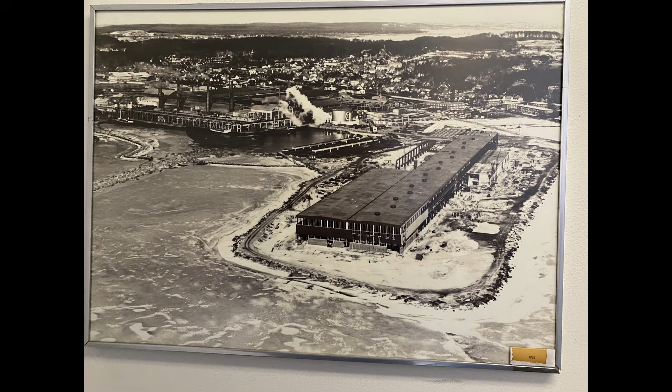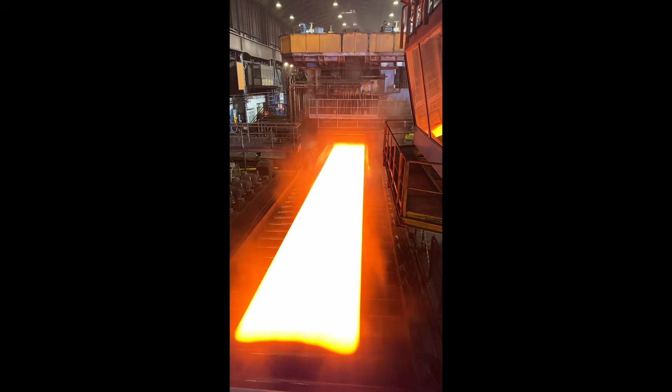In 1999, I started as a freshman at Dansteel, and now, 20 years later, I'm coming back to visit my successors. A lot is still as I remember it, but there have also been a lot of changes. In this podcast episode, we will take a deep dive into the production of very thick plates, together with my new friend Eugene. Hi, Eugene.

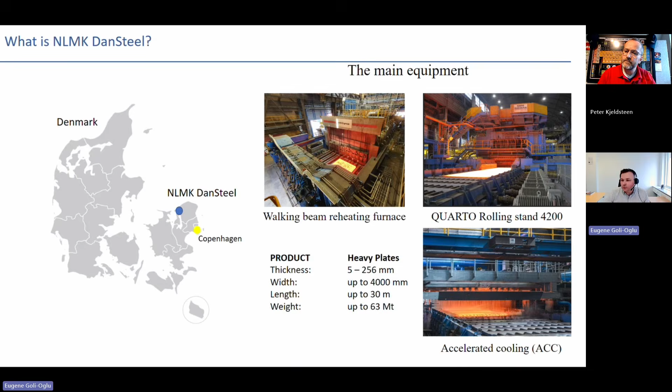Dansteel. Quite big. And steel heavy plates are used in several different industries. In main markets, we have, first of all, wind, both onshore and offshore. We have shipbuilding, boilers and pressure vessels, and bridge building. There are also other industries which require steel heavy plates, but they are normally slightly smaller. In the end, we have around 8 niches, I would say.

Because when you are passing a wind mill, either onshore or, for example, if you are traveling by ferry to Germany, you could see the Kriegers Flak offshore field, and the tower, the foundation and transition piece will be produced from steel heavy plate. The same as a tower when you are passing a normal highway; it will also be produced from steel heavy plate.

Bridges, it's a little bit more options. You could make it from concrete, but a lot of bridges are made from steel, and in this case, heavy plates are used quite often. For now, our maximum thickness, which we delivered to a Belgian bridge builder in 2025, was 147 millimeters in TM plus ACC, which is the most advanced technology. And we're also delivering thicker plates for basements, for complicated connections of the bridges, etc.

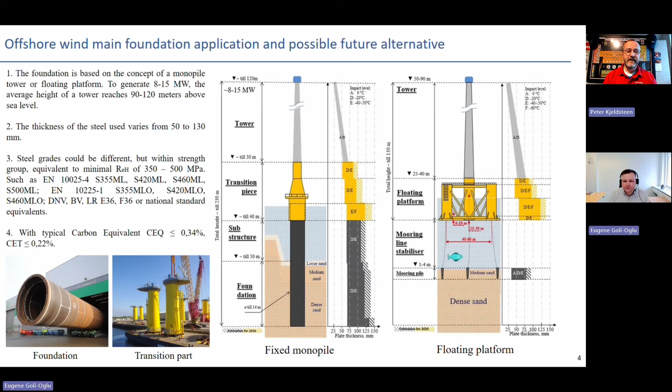Let's jump to the next. Next segment, what I think will be interesting for this podcast is the use of heavy plates for pressure vessels. And the interesting part with pressure vessels is that if you compare a pressure vessel with a tower, it will be very different. A tower, in our eyes, is more or less a standard structure. Of course, there is a lot of variability in thickness, but in the end, it's one type. But there are several types of pressure vessels depending on the final use and what they will carry inside.

Right now, we see good movement in CO2 storage tanks, for example, because the European Union is trying to be CO2 neutral and have zero emissions in the end. It's a combination of discussion, but also something already being done, and some projects are already implemented, and Dansteel is participating in these projects.

As soon as this is a new direction for pressure vessels, it is possible to use different concepts of steel heavy plates for pressure vessels depending on design, and in this case, the fabricator will choose what they would like to do, because we see now the trend that for those kinds of pressure vessels for CO2, the customer fabricator prefers to make them like storage tanks, and here is one example which was produced from Dansteel plates.

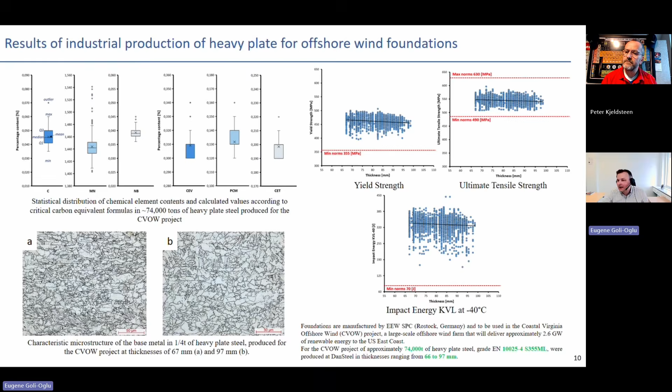And is there anisotropy in thick plates, or is that only seen in thin plates that are cold rolled? Yes, there is also anisotropy of properties, and the thicker the plates, the more complicated it is to make deformation, because the peak of deformation will be at 1/8 of plate thickness, and then it will be lower and lower. And then you have to combine both technology and chemical composition, aiming to achieve as good uniformity of the microstructure as possible, which depends on thickness and grade of material.

Here, for example, for a person looking in an optical microscope it's obvious: condition 1 gives certain nonuniformity, condition 2 gives certain nonuniformity, but if you reach the optimal connection between chemistry, technology and the process regimes, then you can get quite a nice uniform fine-grained microstructure, and this is what we are aiming for.

I like this. When you see a steel mill, it just looks the same. It's just a slab coming in, it's being rolled, it goes back and forth, and that's it. I think there's a phrase that the devil is in the details. This is exactly about these small things. I love that if you do it wrong, you make it wrong. Yes. But I believe that sometimes you still make not the best, and then this is a possibility to learn and to improve the process.

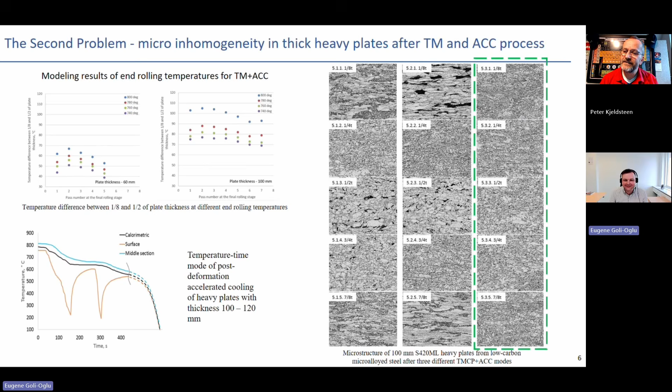And another application which I want to show is bridge building. As I told, bridges can be produced from concrete or from steel, depending on the project and how fabricators see it. Unfortunately, I do not know the balance between concrete and steel bridges. But steel bridges have some advantages because they are lighter and they can work longer. And there are two ways: you can supply plates to build a new bridge, but you can also supply plates for bridge modernization. And this is quite a good example I would like to show.

This is a bridge in Sevilla. Where is it? Sevilla, Spain. Yeah. It was a concrete bridge from the 60s or 70s, and because of the traffic, the community decided that they want to have 3 lanes instead of 2 in each direction. So on the existing structure, they will add steel plates around to reinforce it, and also add steel plates on the bottom side of the bridge. This will solve the traffic problem in the city center of the industrial part of Sevilla.

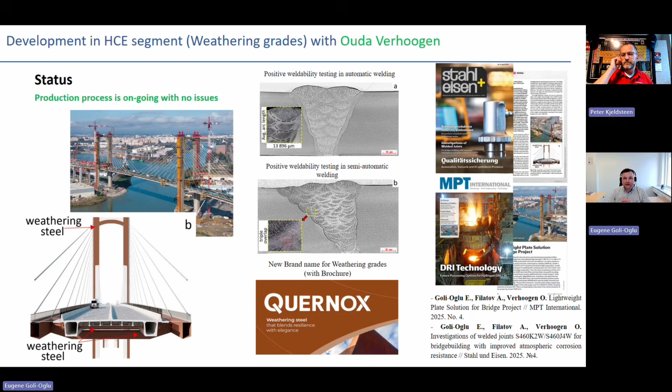And now more and more people are looking at the possibility of electric arc furnace, and then it's actually only two operations: scrap plus furnace, and nothing in between. And for the furnace, you need electricity. And if you could get green electricity, from wind for example, then you will have even less pollution. Then there's also a possibility to have scrap plus DRI, which is directly reduced iron, and to have some kind of balance in using scrap and this DRI, which is also coming from pellets. And each process has advantages and disadvantages.